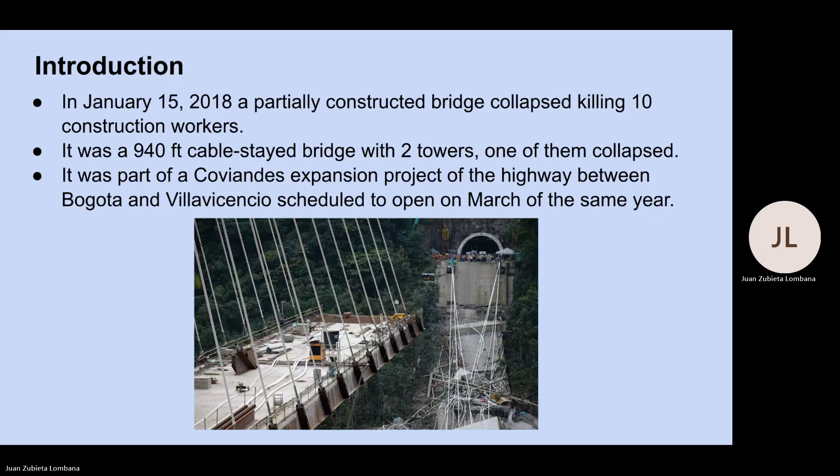So I'm gonna show a video of the testimony of one of the workers. I don't wanna show the actual collapse, just for respect to the victims, but there is no graphic video of the actual collapse either. And this recording was from Reuters.

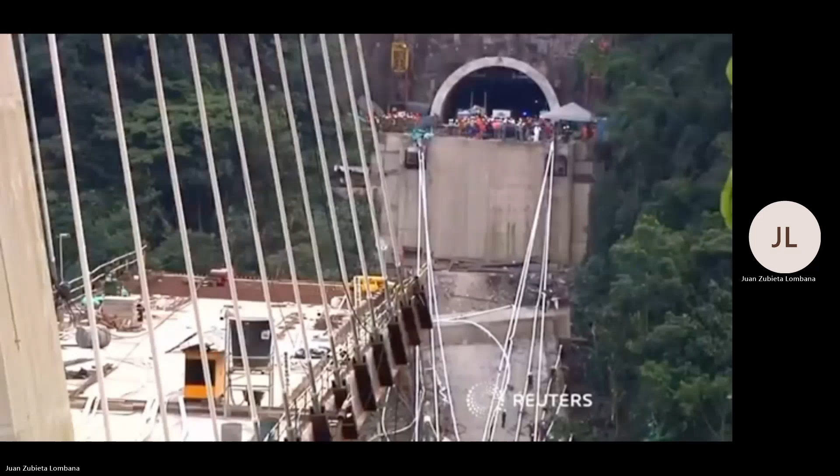Okay. So what actually happened once the collapse happened? The company Modjeski and Masters is one of the world's leading bridge engineering firms, and they do some consulting for design, analysis, inspections, and for all types of bridges around the world. So they conducted the research on why this tower of the bridge collapsed.

So to have some background about this, the collapsed structure was a cable stayed bridge consisting of two diamond-shaped towers. And only the western tower collapsed, destroying that part of the bridge, and the other tower remained standing, approximately in the same construction stage as the collapsed tower. Modjeski and Masters were engaged 1 week after the collapse to conduct the forensic investigation. They did an inspection of the collapsed structure, analytic studies, the evaluation of the design, and reviewed the construction documentation and the testing of materials for the critical structure component.

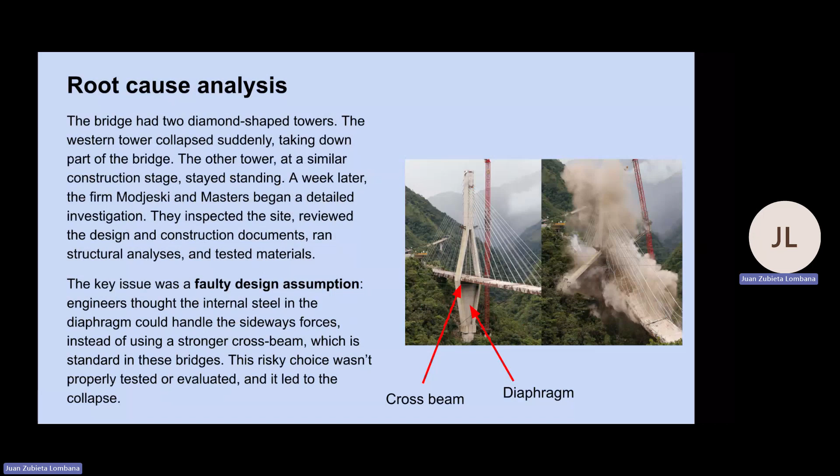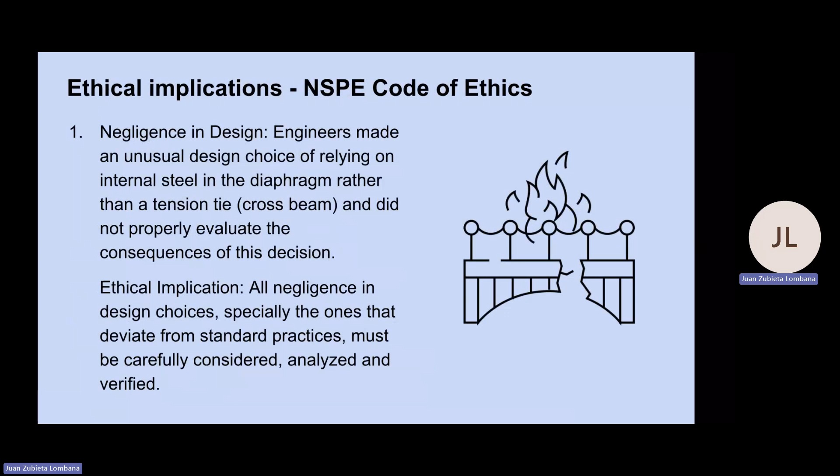So now I'm gonna talk about the ethical implications involved in the bridge collapse, and I'm gonna use the National Society of Professional Engineers Code of Ethics. So the first one was the negligence in design. The engineers involved in this case made an unusual design choice of relying on internal steel in the diaphragm rather than a tension-tie crossbeam, and they did not properly evaluate the consequences of the decision. And I think this goes against the main code of ethics that holds paramount the safety, health, and welfare of the public. And designs, especially the ones that deviate from standard practice, must always be carefully considered, analyzed, and verified before getting into practice.

The second one was the poor risk identification and evaluation. Based on the Modjeski and Masters research study, they said that probably there was poor or no review or evaluation of the design or other potential risks like the stress concentrations. This situation goes against the ethical principle of integrity, and engineers have to make sure their designs or products are always safe. And of course, this can be accomplished by conducting the right risk assessment to identify any risk or problem involved in a project. And by doing this, engineers can evaluate ways to prevent them.

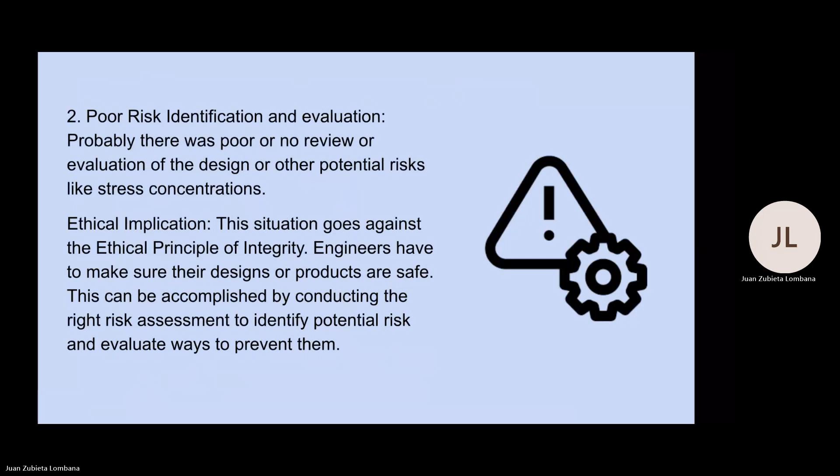So the third one was the neglect of public and worker welfare. So the main consequence of the wrong design was that 20 people resulted injured and 10 of them dead. And of course, the engineers involved in this project had the ethical obligation to prioritize the safety and well-being of all individuals affected, and they did not.

So they were responsible for making a design decision that could have protected human life and prevented harm, as it is outlined in the fundamental principle of engineering ethics, but they decided to not do it. And this could also tie to the lack of transparency and communication. It is really unclear if concerns were ever raised or if risks were known but not communicated, because no one on the project appears to have questioned or reported the flawed designs.

And engineers have a duty to speak up when something seems unsafe or even when a new rule or practice is taking place, because transparency and communication are more important in a project than any technical result. So I think that an engineer that has a suspicion about a design flaw and doesn't speak up will go against the ethical duty to report an unsafe practice.

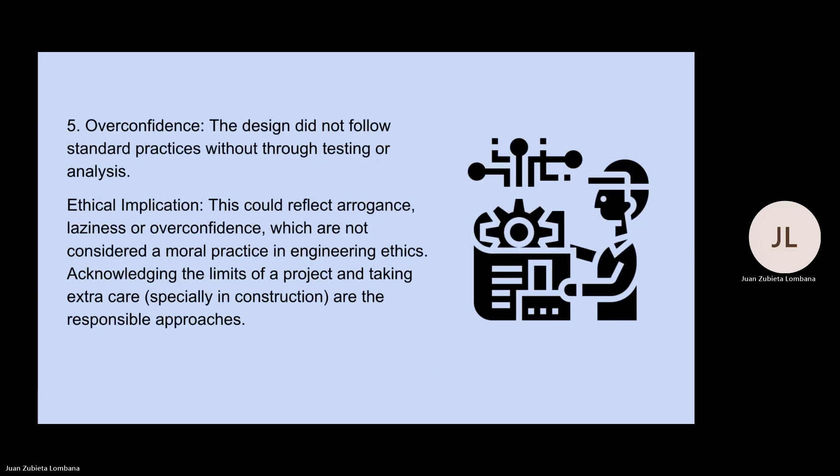So the sixth one and the last one was the negative impact on the public trust. So the bridge collapse shocked the national and international public. While I was doing my research of sources for this presentation, I found out that there were many international sources talking about this. Also, this project was really important because Modjeski and Masters is not a Colombian firm. So I really learned how this project reached beyond Colombian boundaries.

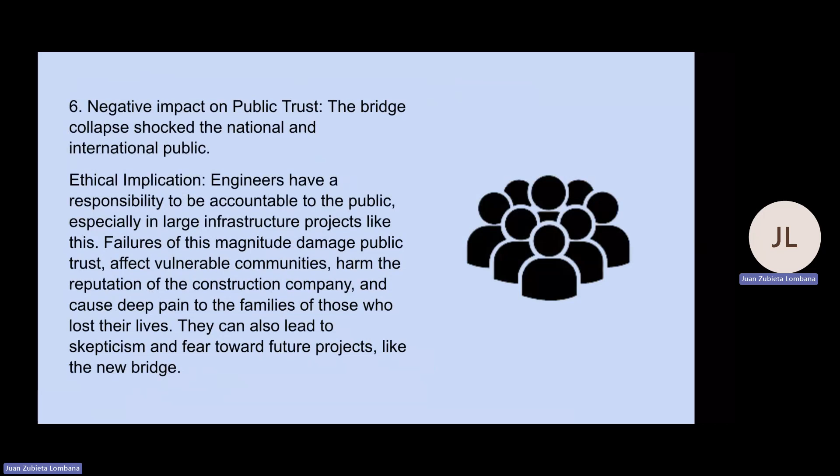And I think engineers have the responsibility to be accountable to the public, especially in a large infrastructure project like this. Failures of this magnitude damage public trust, it affected vulnerable communities, it harmed the reputation of the company, and of course, it caused deep pain to the families of the workers who lost their lives that day. And this also can lead to skepticism and fear of future projects, like a new bridge.

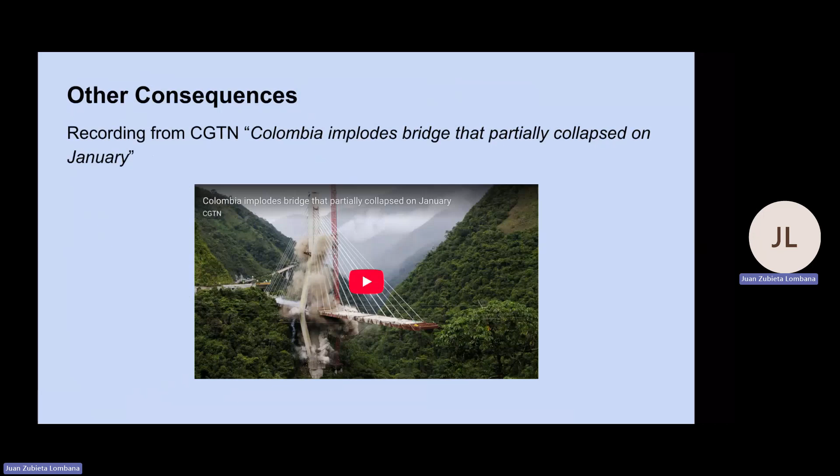So now I'm going to talk about other consequences of the bridge collapse. Of course, I have to remark that the main consequence of all of this was the death of 10 workers. But I'm gonna explore other ones. And this is a recording video from CGTN.

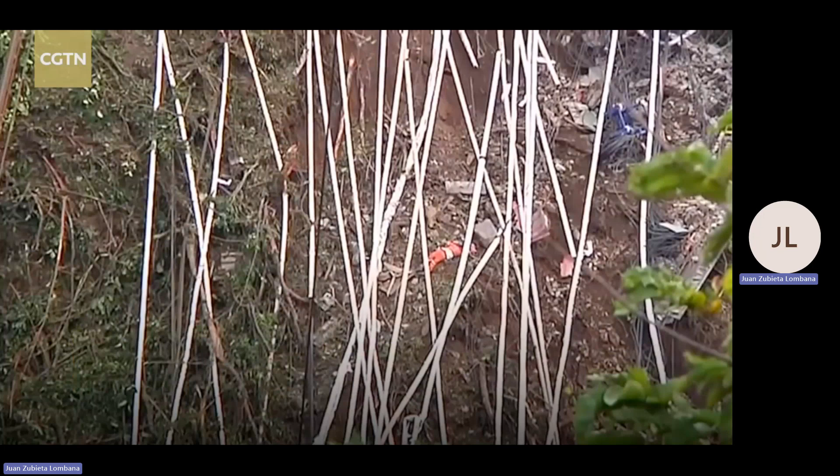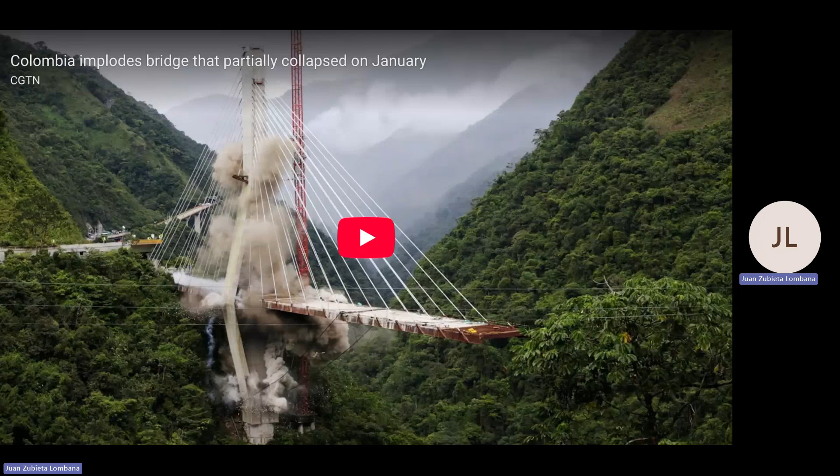Okay. So these consequences underscore the critical importance of the right engineering standards, thorough oversight and ethical responsibility in large-scale infrastructure projects. The first legal consequence was the government accountability. The Colombian Minister of Transportation publicly held Coviandes, the construction company in charge of this project, accountable for the collapse, emphasizing the responsibility for the project's oversight and execution.

Also, there was some third-party accountability of the subcontractors of Coviandes, and Gisaico, one of them, shared responsibility for the collapse, and was ordered to pay over 6 billion Colombian pesos in damages to other involved parties. And I decided to choose to put this consequence because an arbitration tribunal was the one who determined that payment to Gisaico.

And another consequence that involved the financial aspect was the implosion, like in the previous video, and reconstruction of a new bridge. So the Colombian government declined to finance the reconstruction of the bridge. Instead, they actually mandated Coviandes and its insurer to cover all associated costs.

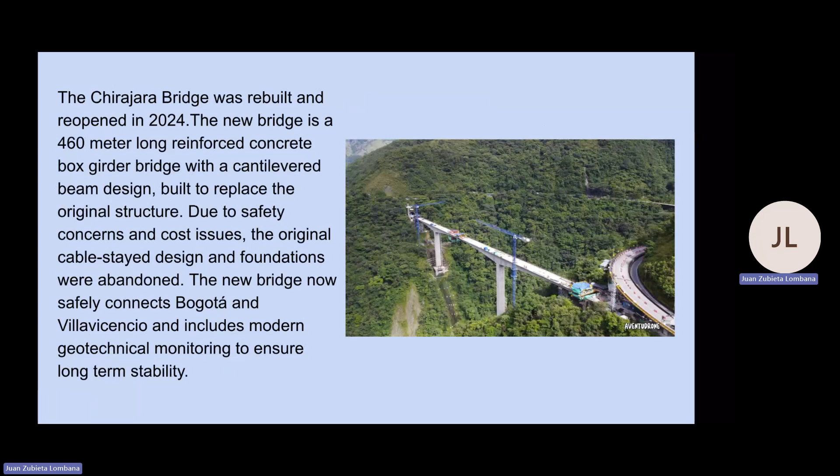So now this is a picture of the new Chirajara Bridge under construction. It was rebuilt and reopened in 2024, and the new bridge is a 460-meter long reinforced concrete box girder bridge with a cantilever beam design, built to replace the original structure. And due to safety concerns and cost issues, the original cable-stayed design and foundations were abandoned. Now the new bridge safely connects Bogota and Villavicencio and includes modern civil engineering geotechnical monitoring to ensure long-term stability.

So this was my engineering ethics final, where I discussed the ethical implications related to the Chirajara bridge collapse in Colombia. Thank you so much for your time.